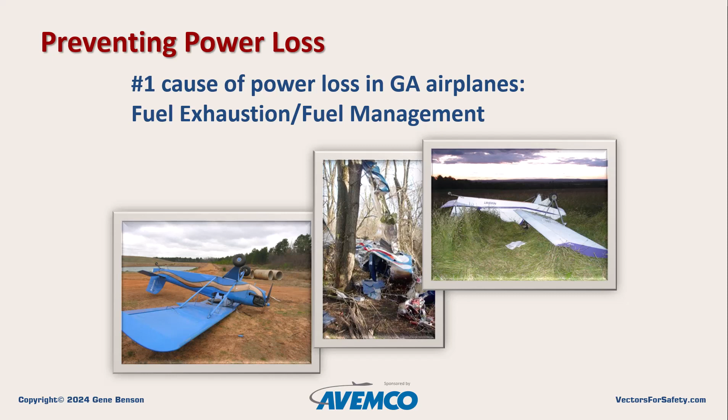Part of that is actually fuel management, or having fuel aboard the airplane but operating on a tank that does not contain the fuel. The remedy for that is good pre-flight planning, including when to switch tanks, and also good tracking of time and fuel consumption as we fly.

Another major player in the cause of power loss is carburetor ice. There seems to be an increasing trend here for all airplanes equipped with float-type carburetors, but particularly in the case of amateur-built airplanes. We must always do thorough pre-flight inspection that includes a watchful eye for any evidence of mechanical problems. Be sure to check the fuel and oil quantities.

The engine will not run without fuel, but it also won't run for very long without oil. Look for evidence of any oil leaks. Little oil leaks can become big oil leaks and result in engine failure.

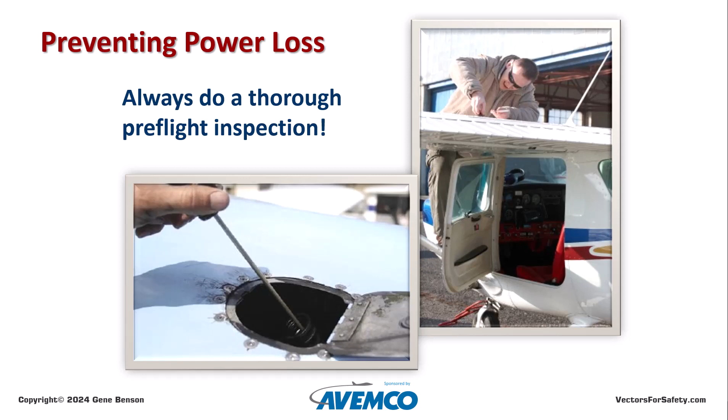Of course, engines quit because of mechanical problems also. There is no way to absolutely prevent mechanical problems, but strictly adhering to maintenance regulations and the manufacturer's service bulletins and the FAA airworthiness directives can go a long way to avoid that deafening quiet.

We must remember that power loss is always a possibility. Flight plan with the possibility of a power loss in mind. Avoid flight over unsurvivable terrain if possible. Carry flotation gear for overwater flights. Be prepared to spend the night in any terrain that will be overflown. Have at least a minimal survival kit and first aid kit. Make sure ELT and battery are in good order, and file a flight plan.

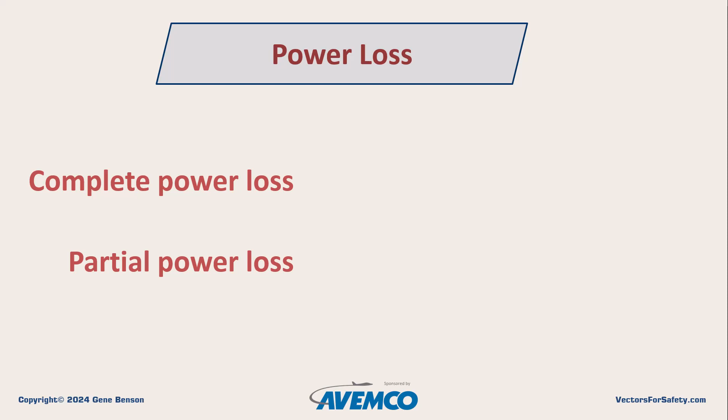Remember that altitude is your friend. Remember that one of the most useless things in aviation is the altitude above you. We might suffer a complete power loss, or we might find that we have partial power still available. Of course, a complete loss of engine power in a single-engine airplane means that we will be executing a landing real soon. A partial power loss, depending on its severity and whether or not the problem is getting worse, may or may not allow us to make it to an airport.

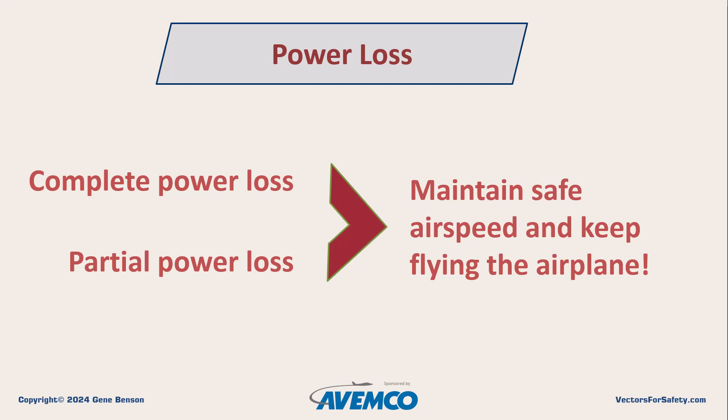The single most important thing a pilot can do in the event of any power loss, or any other emergency for that matter, is to maintain a safe airspeed and keep flying the airplane. A stall spin or any other loss of control issue severely reduces the chance of survivability.

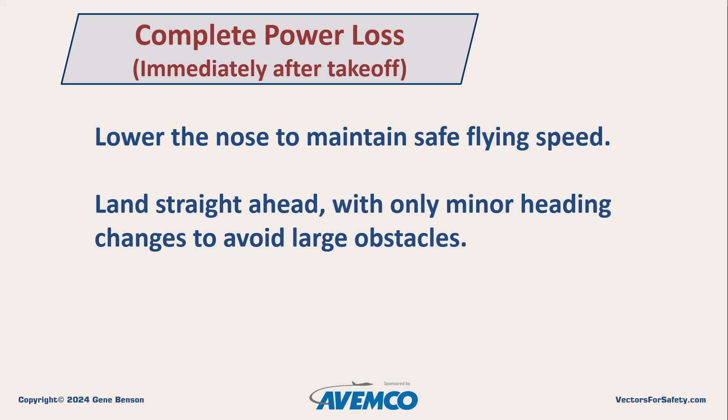Since there isn't much opportunity for an approach and landing if the power loss happens immediately after takeoff, we will just say a couple of things about that and move on. Engines sometimes do lose power right after takeoff. If that happens, our choices are really pretty simple. Lower the nose to maintain safe flying speed, land straight ahead with only minor heading changes to avoid large obstacles, and avoid the temptation to turn back. The impossible turn, as it is called, is rarely successful.

We are making the assumption here that there is no engine power being produced, and you have run the appropriate checklist in an effort to restart the engine. We'll assume that we have secured the airplane per the manufacturer's recommendations. The fuel is off, the master switch is off, the mag switch is off, and we are at best glide speed. We have selected a landing site considering terrain, obstacles, wind direction, and accessibility for emergency equipment.

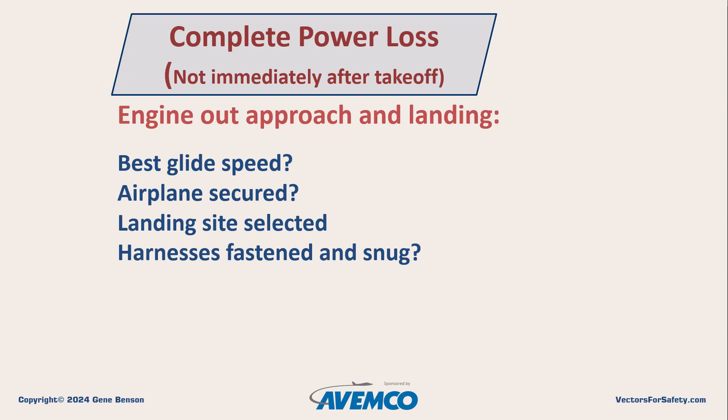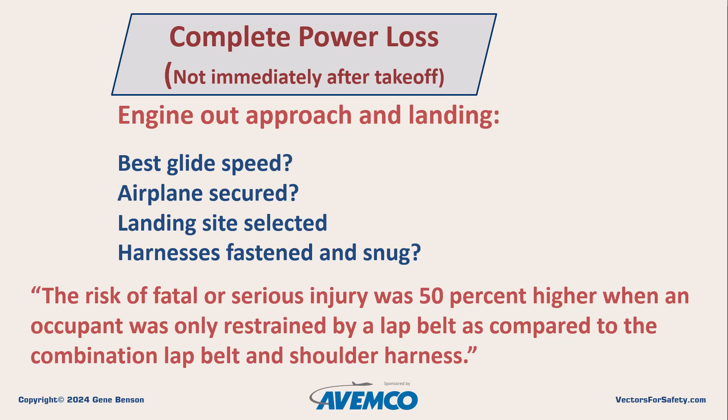How about that shoulder harness? Snug it up and direct your passengers to do the same with theirs. The NTSB has concluded that the risk of fatal or serious injury is 50% higher when an occupant was only restrained by a lap belt as compared to the combination lap belt and shoulder harness. Our objective is to survive. Assume that the airplane is now the property of the insurance company.

Occupant survival is primary. The best chance of survival is to put the airplane down under control and avoid impacts as much as possible. Obviously, a nice landing in a grassy field is ideal, but we might have to land in trees, a swamp, or in a populated area. The key is to find a way to let the airplane decelerate as gently as possible. Going into the tops of trees is preferable to hitting big tree trunks.

Be especially watchful for wires. Wires are very difficult to see from an airplane, but wires are usually supported by poles. If you see poles, there are probably wires strung between them. What if it's at night? Obviously, a forced landing at night is less than optimal.

What about landing on a road? That question will start a lively discussion at the airport cafe. I guess it depends on the road. First, roads are magnets for wires, so watch out for those poles. Some country roads are just not wide enough. I live on a road with poles up both sides and wires frequently crossing from side to side. There is no way a Cessna 172 could successfully land on my road.

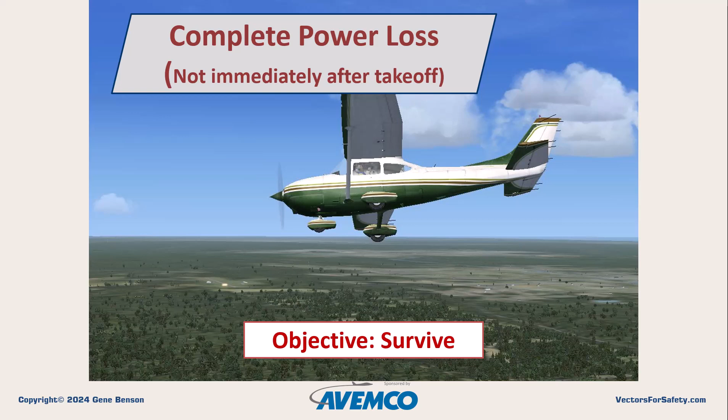The bigger roads are attractive landing sites, but they also have more traffic. Successful landings on larger roads have been done in the past. Of course, try to land with the traffic and turn off into the median or toward the side as soon as practical. We want to touch down with the slowest possible forward speed, which of course means landing into the wind if possible. We cannot address all the possibilities here, but it is worth giving it some thought on one of those non-flyable days.

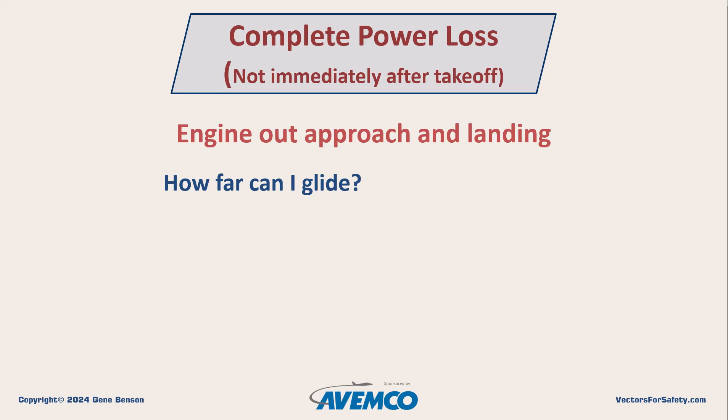How far can the airplane glide with no engine power? The biggest factor in determining that is, of course, how high the airplane is above the terrain. I will stress again, altitude is our friend. A couple thousand feet of extra altitude will expand our potential glide radius significantly. It will also add a few extra minutes to allow us to run a checklist, get the airplane properly configured, brief passengers, or maybe even resolve the problem and get the power restored.

But most single-engine GA airplanes can glide at least a third the distance to the horizon in a no-wind condition, and that is also allowing for a bit of maneuvering to get lined up with the wind before touchdown. Look all around when you're trying to figure out the best place to land. Remember the airports or other wide-open spaces while we're flying, and of course if GPS equipped, don't forget to hit the nearest airport functions. You never know, there might be an airport within gliding distance.

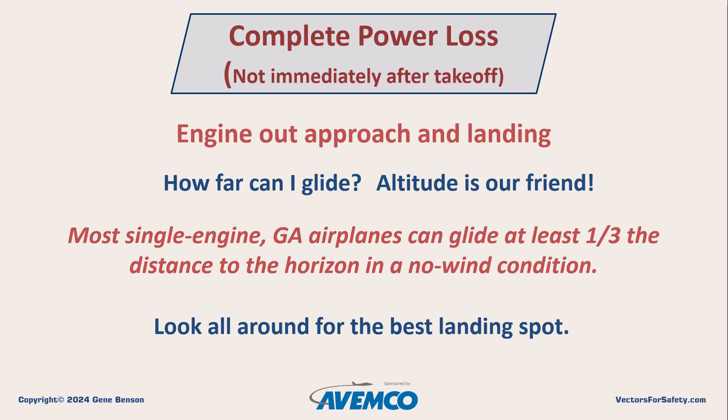Where I live in western New York State, there are many small private airports on the charts that are in the GPS databases that are not suitable for use in the winter or in muddy spring, but at least they are open stretches of land, relatively free of obstacles. It is sure better to land in snow or mud and flip over than it is to go down in trees.

A forced landing is one of the few things we cannot safely practice nor accurately simulate in the airplane. It is just not safe to shut down our engine in flight. And unfortunately, it is very difficult to simulate the effects of the engine out. Closing the throttle is the common method, but there is still not as much drag from the prop as if the engine had actually quit and was windmilling. Much less drag is produced by the stopped prop. That's why multi-engine airplanes that might continue to fly after an engine failure have feathering capability on the props.

But in the single-engine airplane, the prop may or may not be windmilling. If the power was lost because of fuel exhaustion, for example, the prop will probably continue to windmill right up until touchdown. But if the engine quits because of a lubrication problem, the engine may seize, causing the prop to stop. To simulate this, we can keep just a little bit of power on in an attempt to replicate a zero thrust condition. But it is impossible to know exactly how much power to keep on. So the bottom line is, unless you have access to very accurate simulation, a forced landing will be your first attempt at a maneuver that has little margin for error.

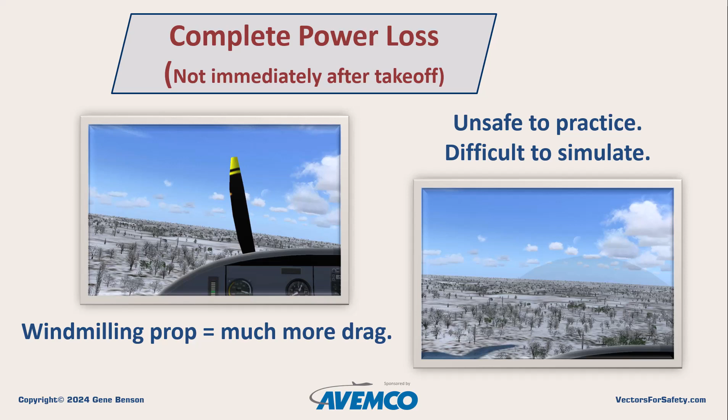I guess that illustrates why we should take every possible precaution to make sure the engine doesn't lose power during flight. So to summarize, we want to prevent the loss of engine power by having good maintenance and doing good pre-flight planning. We want to plan our flight to avoid unfriendly terrain if possible. We want to have as much altitude below us as is practical given airplane limitations and weather conditions. If we encounter a power loss, we want to have some items committed to memory, and we want to have a checklist readily available for the remainder of our items.

Above all else, we must maintain a safe airspeed and continue to fly the airplane. We want to make a smart choice of a landing spot, considering what is available all the way around the airplane. We want to have everybody aboard securely strapped in with lap belts and shoulder harnesses. And finally, we want to touch down at the lowest possible forward speed to minimize impact forces.